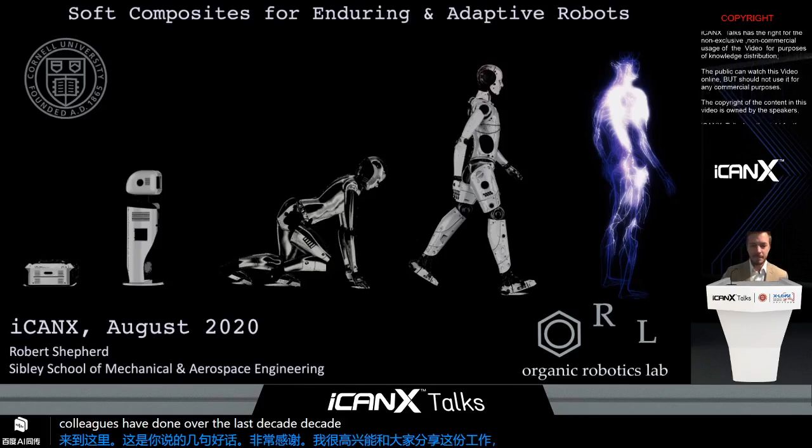Thank you very much. I'm excited to share the work myself and my colleagues have done over about the last decade. I'm going to structure the presentation more as a survey, a high-level presentation, and I encourage you to read the papers I talk about, and particularly the supplemental information, because a lot of details are buried in there.

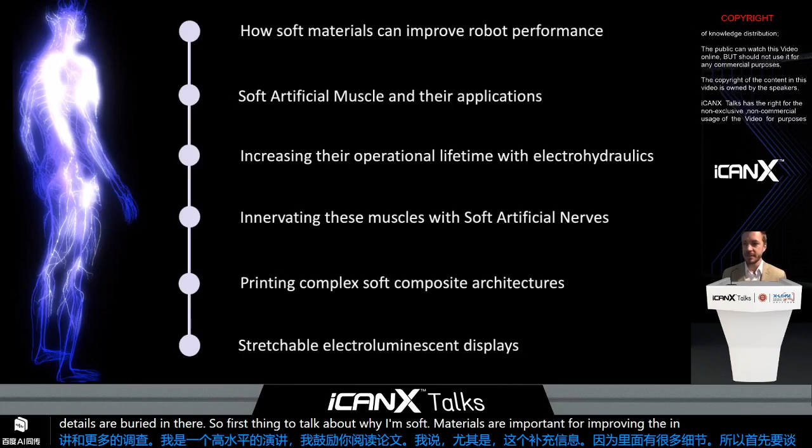So first, I'm going to talk about why soft materials are important for improving the endurance and adaptability of robots generally. We'll talk about soft artificial muscles specifically and their application right now. Then how we can use these soft artificial muscles in combination with electrohydraulics to improve the operational lifetime of robots. Then how we can add sensing, touch sensing, to these musculoskeletal architectures.

And all this is really complicated, so if we have to manufacture these and it's too hard, it's not worthwhile. But luckily additive manufacturing allows us to do these things, and so I'll talk a little bit about printing soft composite architectures. And then I'll end, if there's time, with stretchable electroluminescent displays.

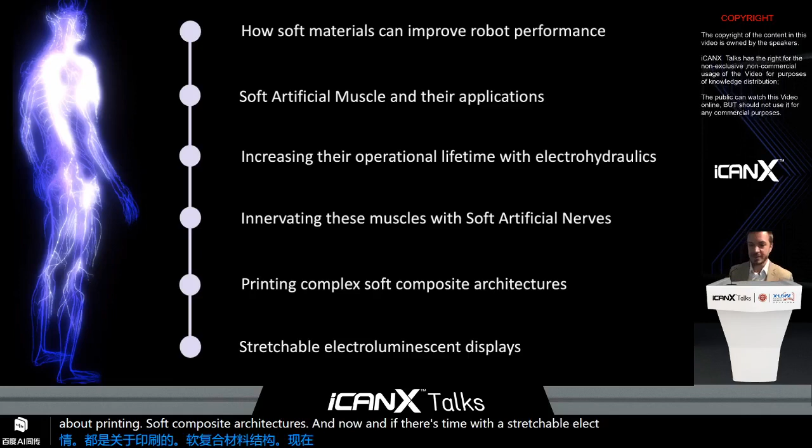So there's a fundamental contradiction that we need to solve, or a basic contradiction we need to solve in robotics, and that's that we can have enduring robots right now today, or we can have agile robots right now today, but we don't have both.

An example of an enduring robot is that of an autonomous vehicle, and they can already drive for, at least in the electrical versions, more than 300 miles on a single charge, go faster than 200 miles per hour, and accelerate from 0 to 60 in 2.5 seconds. But at least in the US, the reason this works is because we have flat roads, and that costs us hundreds of billions of dollars, probably around $1 trillion today, to create that.

Legged robots wouldn't need roads, but they're very agile. You've all seen examples of robots doing backflips and running and all these things, but they can't do it for very long. It's not comparable to wheeled vehicles and not comparable to their animal models they're based off of.

At this point, I'll also say there's a lot of prior work that I would like to cite and talk about, but there's not that much time. And also I didn't know about taking pictures off of their papers and putting it on here and the copyright consequences, so I won't be talking specifically about that, but please, I'll let you know along the way as I'm reminded of other people's work.

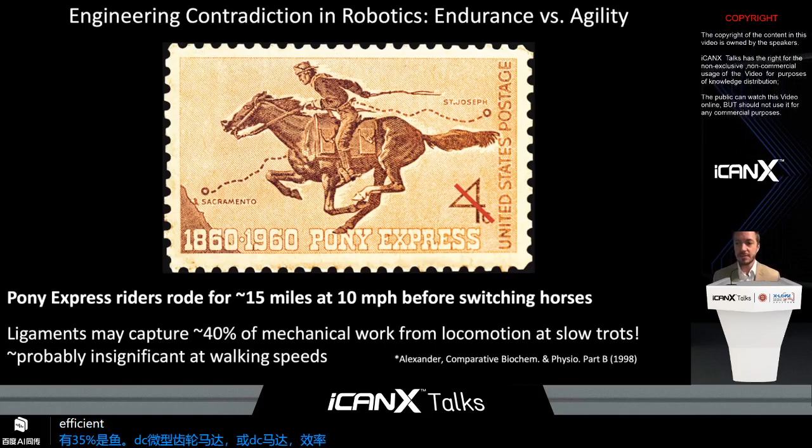One of the reasons these animals were so efficient and effective at what they were doing is that their musculoskeletal structure, ligaments, and both soft and hard composite architecture are very energy efficient, even though they're working with not the most efficient actuators. Muscle is around 35% efficient. A DC microgear motor or a DC motor is something like 85% efficient. So the animal world doesn't have the most efficient systems, but they deal in the real environment in a very efficient way.

So to boil it all down, the reason animals and humans are so effective over, let's say, anthropomorphic robots, is that we have hundreds of skeletal muscles, depending on how you want to think about it—could be thousands or tens of thousands. Robots have tens of actuators. We have vasculature that delivers energy-dense power to our motors, our muscle. Robots have a centralized power system that delivers energy over wiring to remote locations.

This power source is a single function—all it does is deliver power, it doesn't do anything else. Our vasculature handles thermal loads, removes waste, performs a lot of other functions.

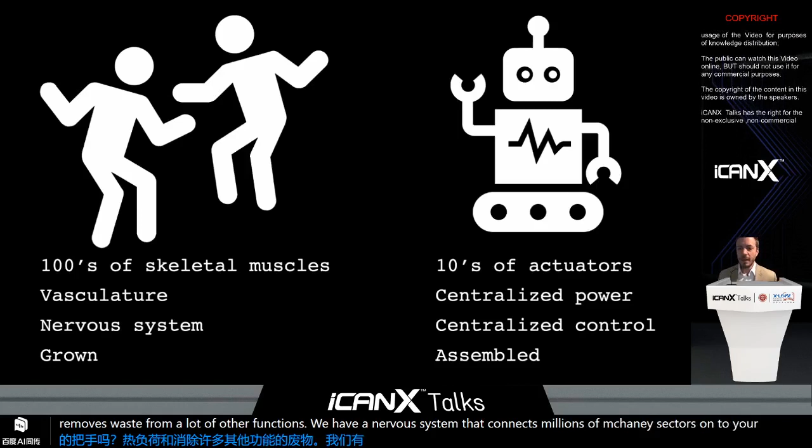We have a nervous system that connects millions of mechanoreceptors to our brain. A robot has a centralized controller that does sensor fusion for just a few types of sensors: vision, sometimes tactile sensor, optical encoders, stuff like that, but many orders of magnitude less information than we use. And humans and other animals were grown from the bottom up, and that allows us to be complicated, where robots are assembled from the top down and fundamentally limits the complexity that robots can have.

I find it interesting that the very first use of the word robot was in Rossum's Universal Robots, a play published in 1921. In this play, robots were grown or synthesized from a green sludge, organic matter. But in the plays that came after it, robots were represented as metal, rigid structures. I think if we had embraced chemistry or soft materials from the onset, we'd be farther along than we are now in this space.

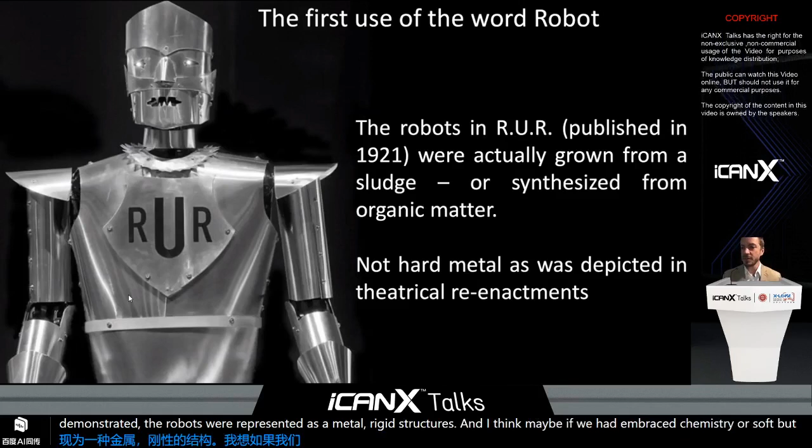And I think we're getting there now. Nature designs with toughness in mind, not really strength. One reason is that high temperatures aren't really available in nature, and you need high temperatures for processing ceramics and metals. But rubber, polymers, and other composites don't need to be processed at high temperatures, and that's why you see soft materials so prevalent in nature. It doesn't mean it's the best choice all the time, but it's generally a good choice, and that's why we see it everywhere. You can see that in the stress-strain curves of ceramics, metals, and rubbers.

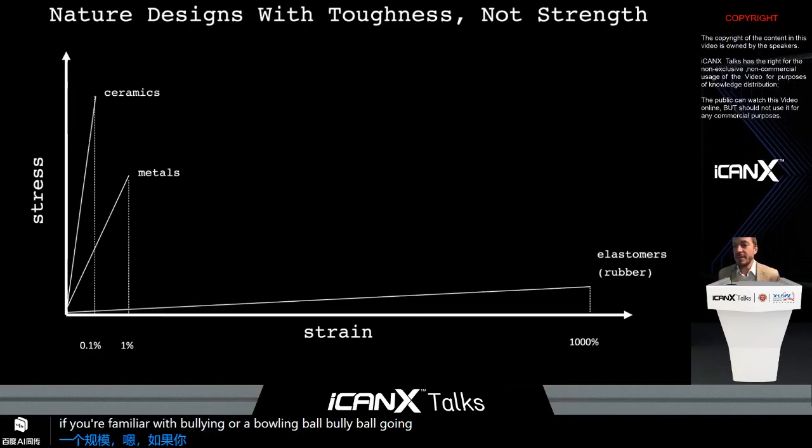Now, these aren't to scale—or they are to scale, but they're disproportioned. Still, rubbers absorb huge amounts of energy, megajoules per cubic meter. To set a scale, if you're familiar with bowling, a bowling ball going down an alley to knock pins over uses around 10 joules. So that's how much energy these rubbers we produce are capable of absorbing.

Rubber and polymers are a completely different type of material than a ceramic or metal. If you look at a simple model for rubber deformation, it's entropy dominated. That means polymers want to be a random, coiled network, which gives them the most configurational entropy. But when you stretch them, you're aligning those polymers, which is entropically unfavorable—it reduces the entropy, which is energetically unfavorable. Since this is a conserved volume, when you stretch it, you shrink in the other directions.

So you can relate these principal strains to each other. If you take the derivative of that free energy while stretching in one direction with length, you get the force required to stretch in that direction, and then, dividing by the area, gives you the stress. That stress is proportional to the number density, N over V, of polymer chains and the temperature. This quantity is the modulus of the material, how hard it is to stretch. If you increase the temperature, you increase the modulus—you make it harder to pull. This is very different from a metal, where as you heat it up, it becomes softer. So this is sort of like an alien material.

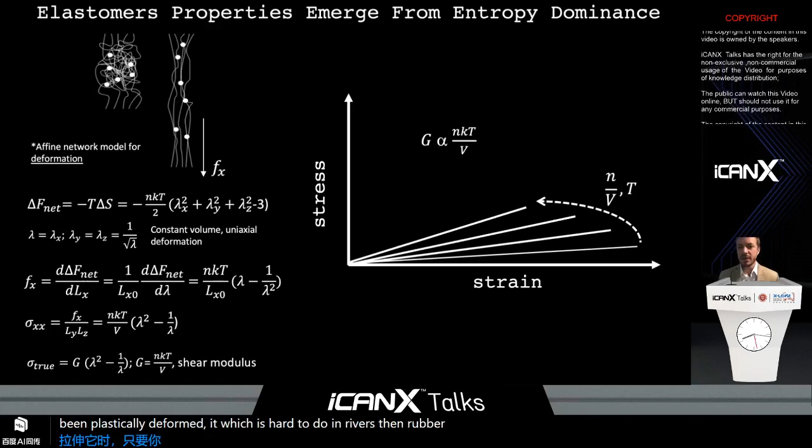Another benefit of using polymers in your robots is that when you stretch it, as long as you haven't plastically deformed it—which is hard to do in rubbers—then when you relieve that stress, you return to the original shape with little energy lost using today's synthetic rubbers. That means you get ligaments for free in your musculoskeletal architecture.

This is an early example of a soft gripper that we made. I made this when I was a postdoc in George Whitesides' group. What it shows is as you're inflating these fingers, they're wrapping around this fennel and finding the best way, probably a very good way, to distribute the force across the surface of that fennel to pick it up.

The reason I like showing this is it's doing this as a material computation. There's no computer in the loop here in the traditional sense. The material, or the fingers, are applying a force, getting force feedback from the fennel, and that stress-strain response causes the reconfiguration of those fingers. That is a material computation we do all the time. In the animal kingdom, we post-process and filter information mechanically before it gets to our brain at all, and that allows us to handle the environment much better.

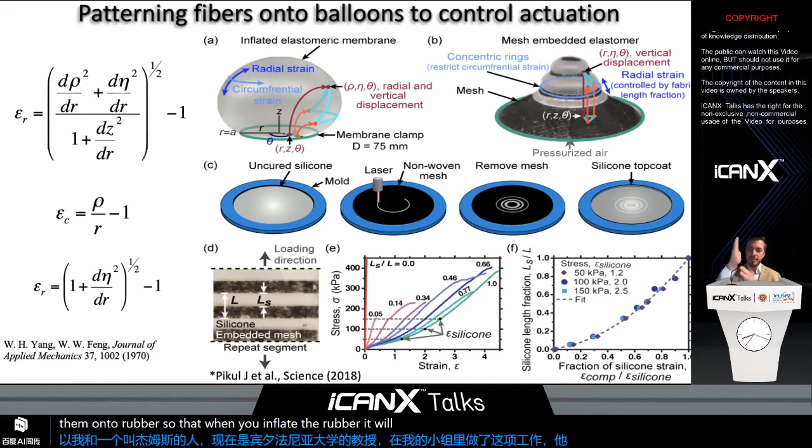By removing the circumferential strain from the modeling or predictive analysis, it becomes easier to tell how our actuators are going to respond. James Pikul, who's now a professor at UPenn, did this work in my group where he laser cut circles or rings of fabric and patterned them onto rubber, so that when you inflate the rubber it'll radially project where there is no strain limiting layer.

As an example of the power of this simple approach, he patterned an aloe plant shape so that when he inflates it, you can project these little projections. Based on the model he developed, we can program in zero and positive Gaussian curvatures, which in theory is all you need to replicate any shape.

I think fluidic actuators, or these types of balloons, are a very powerful approach for making soft robots. They're high force density, simple to make, and here's some examples of where we've applied them.

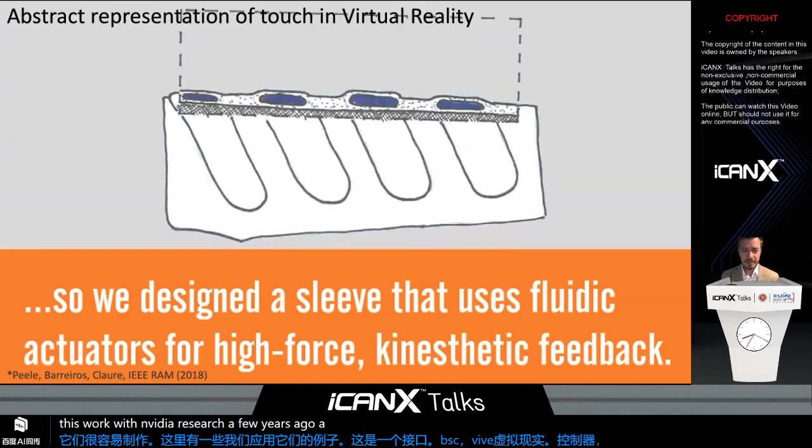This is a haptic interface for an HTC Vive virtual reality controller. We did this work with NVIDIA Research a few years ago. These are pockets wrapped around the handle of a VR controller, and when they inflate, you actually feel it on your hand.

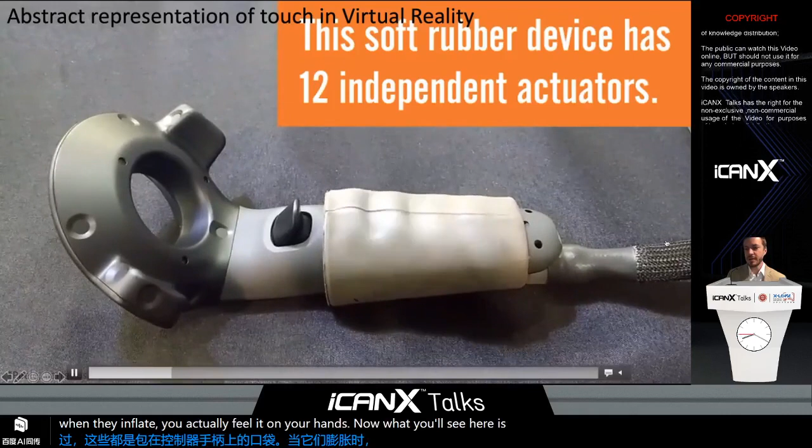Now, what you'll see here is a tether coming off because we need to deliver air or fluid. So these are tethered, and that is a disadvantage. But in a few minutes I'll show you one way we're working on getting rid of that tether.

In this case, what you're seeing is when Bryan Peele, who now works at NVIDIA, was squeezing that trigger, he made it so it felt like liquid was going through his hand.

That of course isn't what really happens when you would squirt a gun, but it's an abstract representation of touch. And because it's robust manufacturing that we can do, since these fluidic actuators are quite easy to make, he and Ben Mac Murray, who's now at 3M, were able to demonstrate this for thousands of interactions, and people really liked the tethered haptic controller versus the other one.

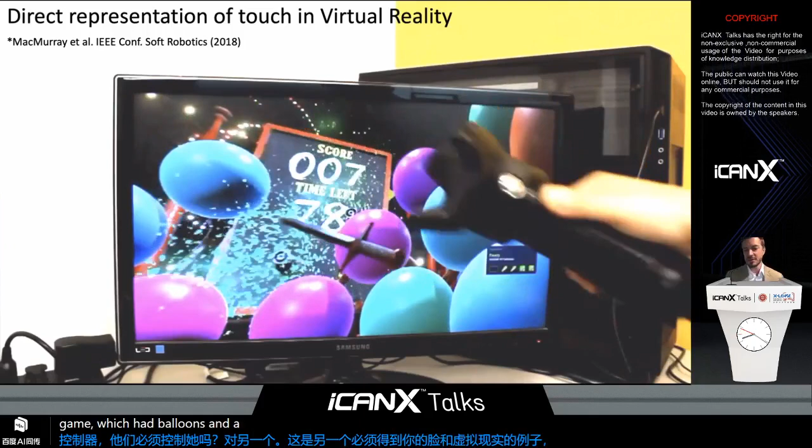This is another example of a haptic interface in virtual reality, where Omer Shapira at NVIDIA made this game with balloons and a steel sword, so you could pop the balloons when you hit them. But Ben, controlling it, can squeeze on the handle, send a barometric control to the computer, deflate the handle, and turn it into a spongy sword.

This spongy sword, of course, can't pop balloons, and you can see that in the game, but Ben also feels like he's holding a spongy sword because he has deflated that controller. This isn't an abstract representation of touch, this is a direct representation of touch.

We've also applied this to assisting with cardiovascular problems and helping a heart pump. Working with Weill Cornell Medicine, we received a CAD model of a heart, and then Ben molded a sleeve that would wrap around the heart and, when inflated, help it pump.

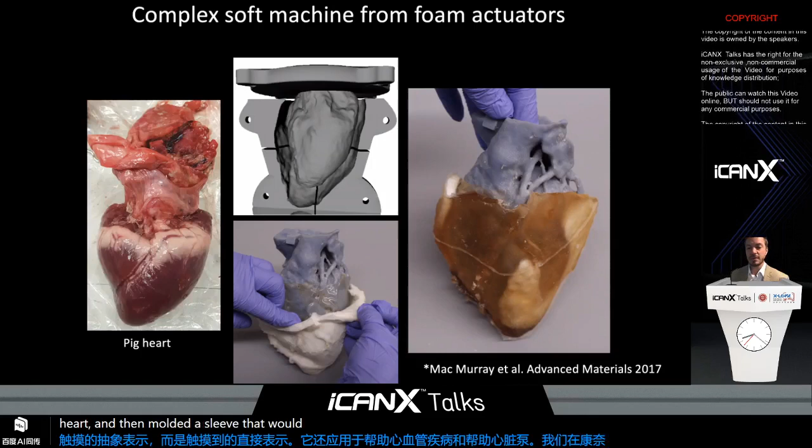We used an EKG to sense a heart rhythm, and then at the appropriate time, inflate the actuators. We were able to do this in time, so this is in rhythm with a heartbeat. And this is that sleeve helping this heart pump.

We were able to apply physiologically relevant, though not quite high enough yet, flow rates and pressures. You can see that this sleeve we made is thicker than it should be, but there's a lot of promise here to make a thin sleeve that can help the heart pump. An advantage here is that you don't put holes in the heart, which is how it's currently done, and it could even potentially be used for pediatric heart assist devices.

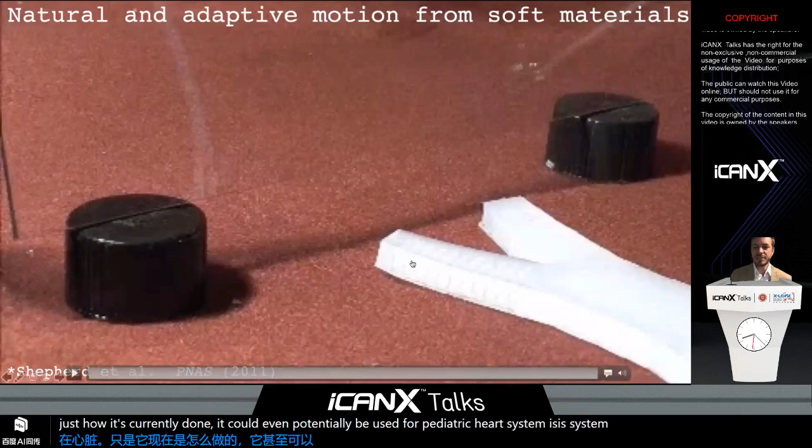So that was all applications in the non-mobile space.

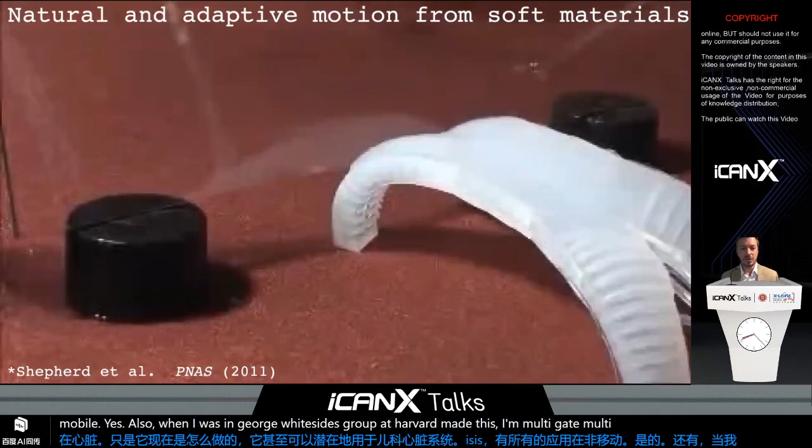When I was in George Whitesides' group at Harvard, we made this multigait soft machine that could walk towards this obstacle, and I'm controlling it from the other side. A much younger version of me was controlling it. When it hit that gap, I changed my control to cause it to undulate to the other side, still pulling along that tether - I'll talk about removing that tether later. When we get to the other side, I inflate the spine, and then it stands up and walks away, I promise you.

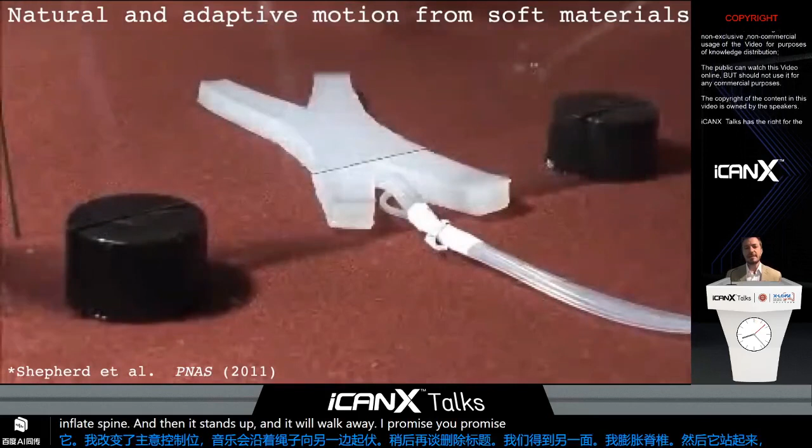We can call this a machine, or a robot in the materials community, because there is the potential for a stress strain response via that material computation. But we can also make it a real robot in the traditional sense by making it larger and putting the onboard electronics, sensing, and actuation in.

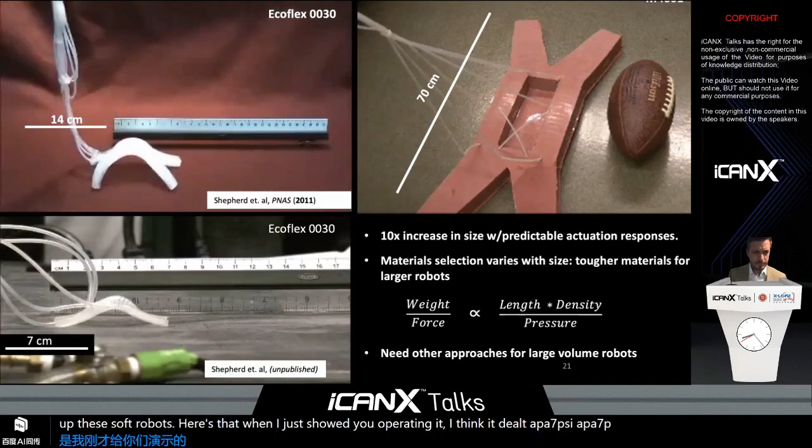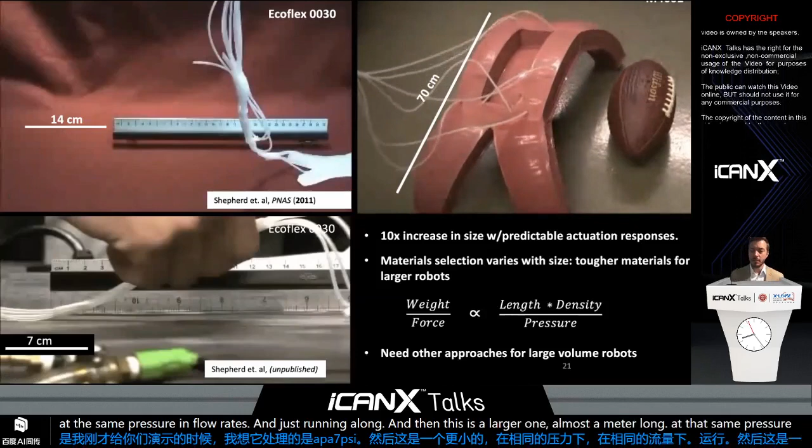But there's a problem with scaling up these soft robots. Here's that one I just showed you, operating at a delta P of 7 psi. This is a smaller one operating at the same pressure and flow rates, just running along. And this is a larger one, almost a meter long, at that same pressure and flow rate - it's moving much slower. Of course it would, because this is a mass transport problem. So this robot, this machine, is slowly lumbering along.

Also, when we increase the size of it, the weight goes up with the cube of the length, but the area only goes up with the square. Since we are causing force with pressure transduced over that area, eventually we lose and we can't lift this robot up with the same pressures. So we have to increase the pressure. The reason this robot is colored differently is because we're using a higher elastic modulus silicone so that I can eventually use higher pressures to cause it to go faster. That box, that relief pattern in the middle, holds the electronics, air compressors, and things like that.

But I think huge soft robots on land aren't the right answer.

So my first student was Huichan Zhao, who's now an assistant professor in mechanical engineering at Tsinghua and doing really good there. She helped solve a problem.

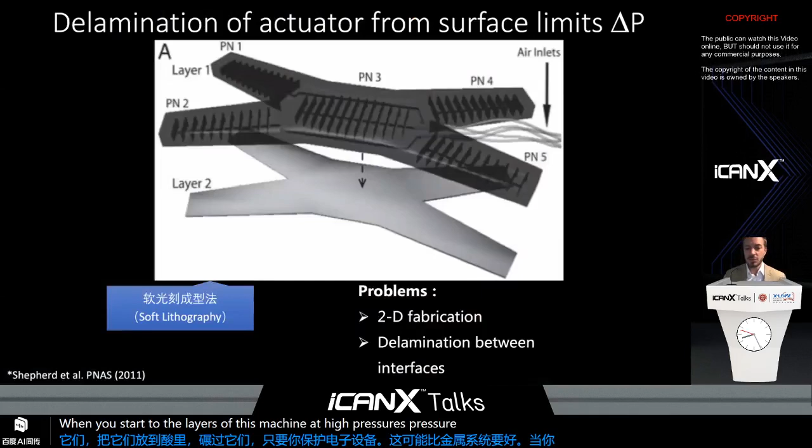If you look in this section of this robot, you can see this sort of bandage. That's because over time, you start to peel apart the layers of this machine at high pressures because we're bonding one piece to another piece, and that creates a very weak interface.

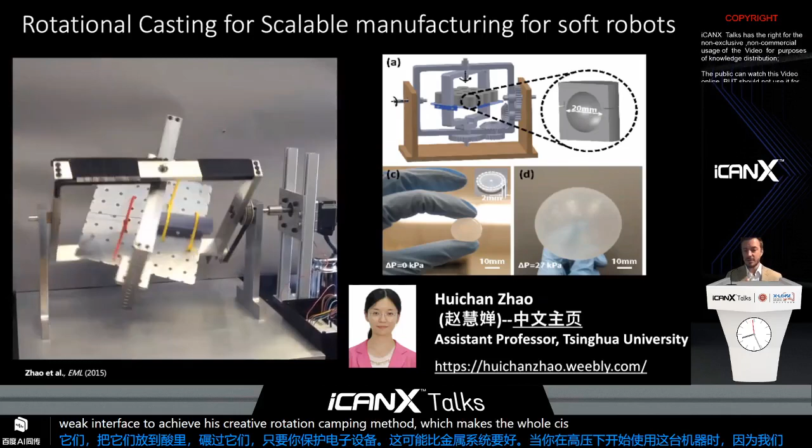So what she did is create a rotational casting method, which makes the whole system monolithic - there is no bonding of anything. She made a little hollow sphere and inflated it just to show this principle, making actuators that could apply 10 times the force of other similar actuators because she can apply higher pressures. So that is one approach to having larger robots using higher pressures.

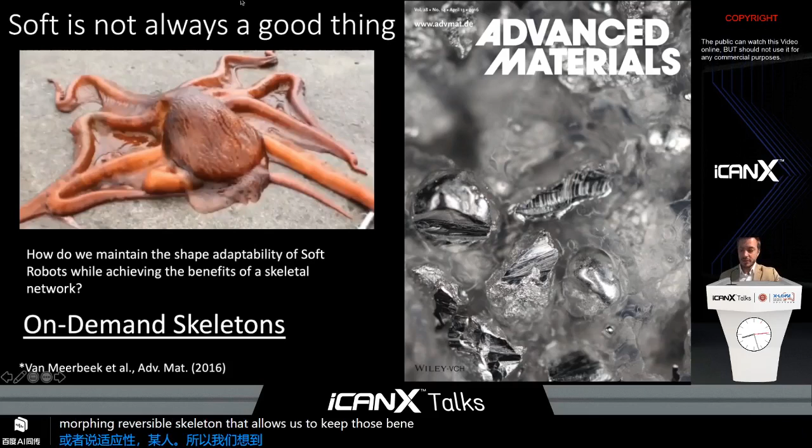But if we have a skeleton, we reduce our ability to morph, which reduces our adaptability somewhat. So we came up with an approach to create a morphing, reversible skeleton that allows us to keep the benefits of a morphing soft structure, but also bear load when the skeleton is on.

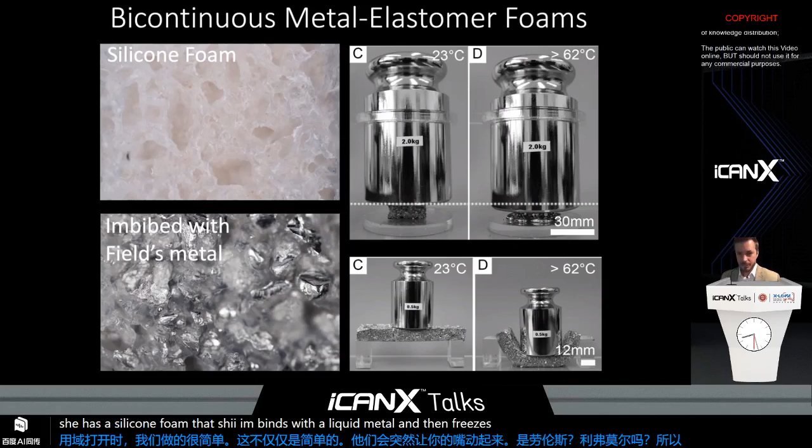We did that simply - this is Ilse van Meerbeek's work, who's at Lawrence Livermore right now. She has a silicone foam that she imbibes with a liquid metal and then freezes that metal at a low temperature. This is Field's metal, and it melts at around 60 degrees Celsius. So at low temperatures, it can bear a lot of load, and at higher temperatures, it deforms. That's the quite simple principle.

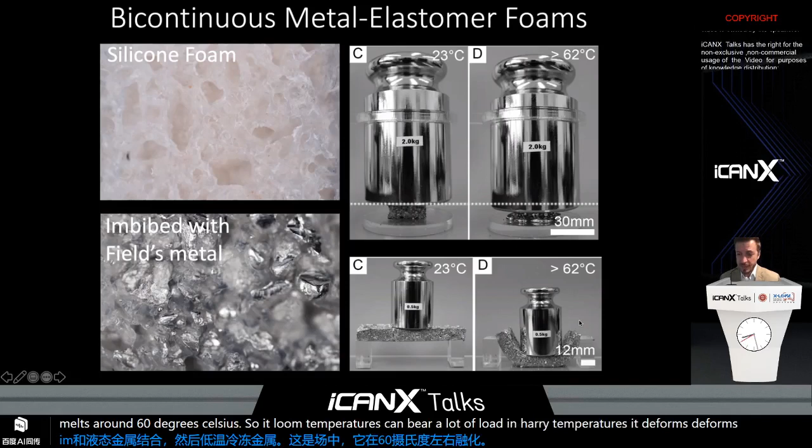It behaves a little bit like bone, because if you stretch it in its molten state and freeze it, you increase the yield stress in the direction you're stretching it. Bone does the same thing - if you're applying load to your skeleton and you have more load on one side of your body than the other, your bones will get thicker on the side you're applying load on.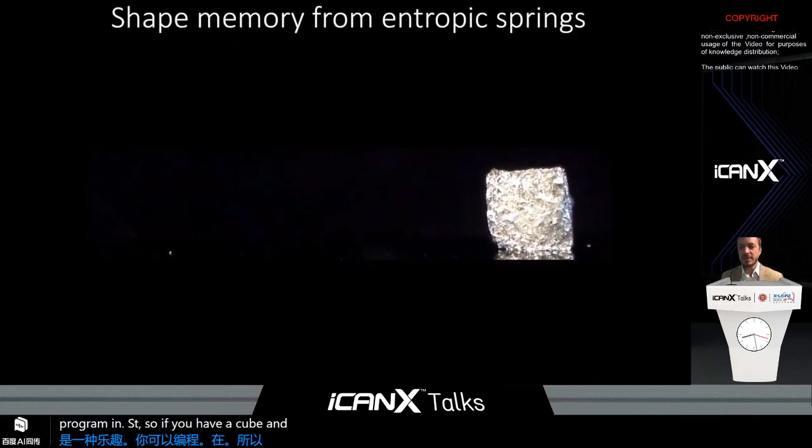And this is just kind of fun - you can program in strain. So if you have a cube and then you force it into a cylinder and freeze it in that state, because of the entropic elasticity of the rubbers we talked about before, you can get a single actuation event when you heat it up later.

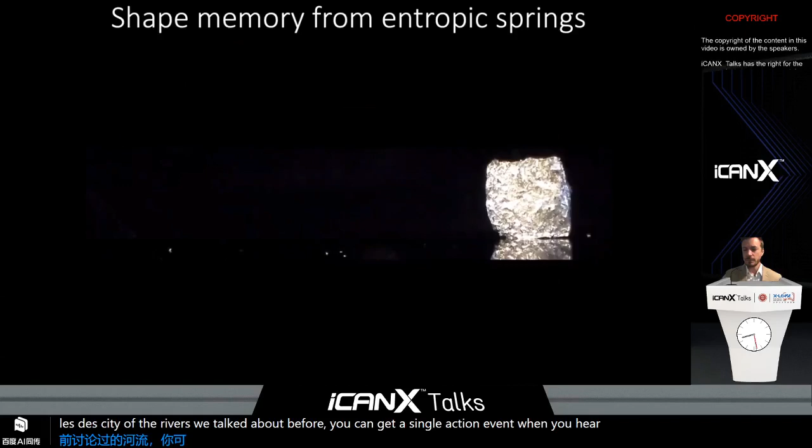So these are ways we can have soft artificial muscles that also behave as the architecture for the robot, and even have reversible skeletons. But you've seen tethers in all of these systems because we're delivering compressed air.

There's an opportunity to use fluids or liquids that are energy dense, like our own blood, in these fluidic actuators. Why would we do that? Because that same octopus on land, underwater has tremendous attributes. So what we want to do is make robots for use underwater, so that we can have an additional benefit of using hydraulics. Because if we have this hydraulic robot on land, it's not buoyantly matched, or not buoyantly supported, so it would be very heavy on land and have the same problems as that octopus we saw earlier. So it does appear that marine environments are a very good place to experiment and explore with soft robots, or very soft fluidic robots. So this is our first attempt.

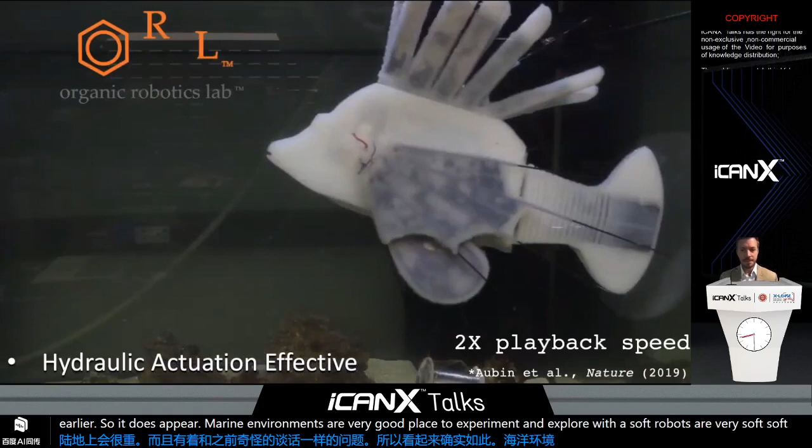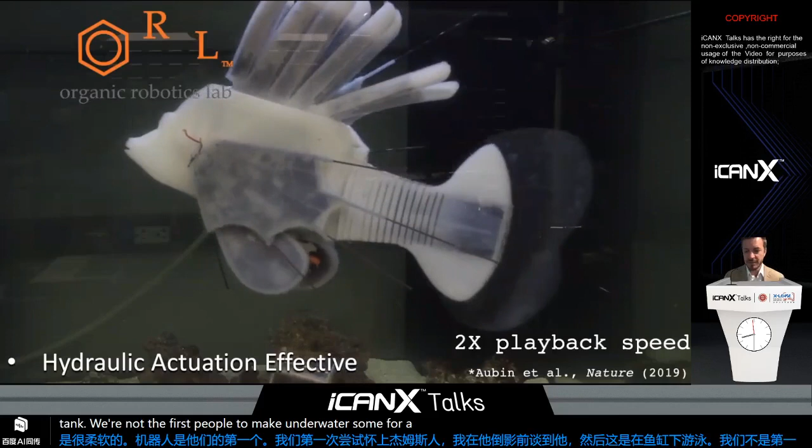You can see James Pikul — I talked about him before, his reflection there — and then this is swimming underwater in a fish tank. But we're not the first people to make underwater soft robots. Daniela Rus's group at MIT has done a great job of that. Cecilia Laschi's group at IIT, same thing.

This is a little different. If you open it up, we have pumps: a pectoral fin pump and a tail fin pump. The tail fin pump causes the tail fin to move back and forth and propel the robot. This pectoral fin pump just causes this pectoral fin to open and close as a biomimicking thing. It doesn't really help its propulsion, but this is exploratory, and so we wanted to try something else.

And it has two circulatory systems in it. This pump moves liquid in these pectoral fins, into and out of these pectoral fins, into this reservoir and back to the pectoral fins. And the tail fin is moved by moving fluid into and out of it to cause it to swim. You can see this red part here, and that's a catholyte.

And that's the biggest difference between our underwater robot and other ones: this catholyte is part of a half-cell redox flow battery. Here's an example of the pelvic fin battery, which goes here, which has a flexible zinc anode and the red catholyte. So that allows half of this to be a liquid battery that can then be used to pressurize these actuators and cause the fins to move.

You can see this liquid being pumped through this pump here. The overall reason for doing this is that if you replace the inert hydraulic liquids used in these fluidic actuators with a redox flow battery chemistry, or other energy dense fluid, to power electronics, you can power these pumps with the same fluid that is being used for actuation, which increases the overall energy density of the system. So if you look at this graph here, by using a 124 watt hour per liter zinc iodide half cell battery, we were able to increase the operational lifetime by about 3 to 4 times — increasing the overall energy density of this fish.

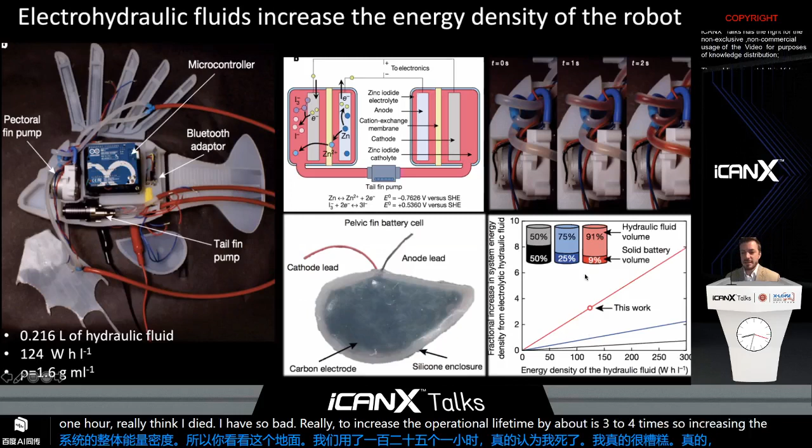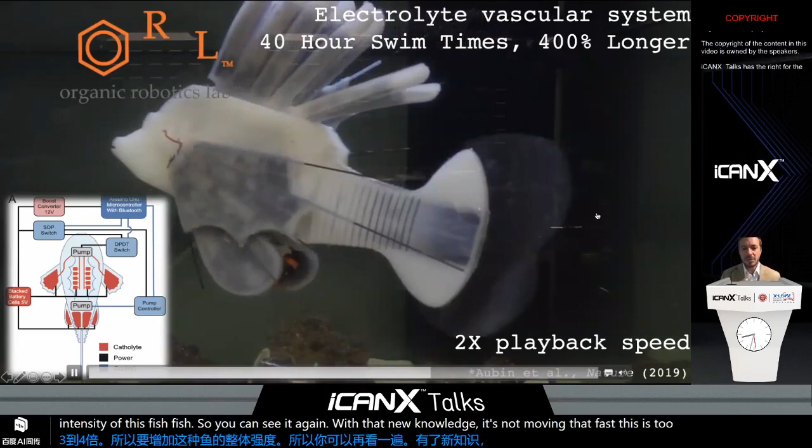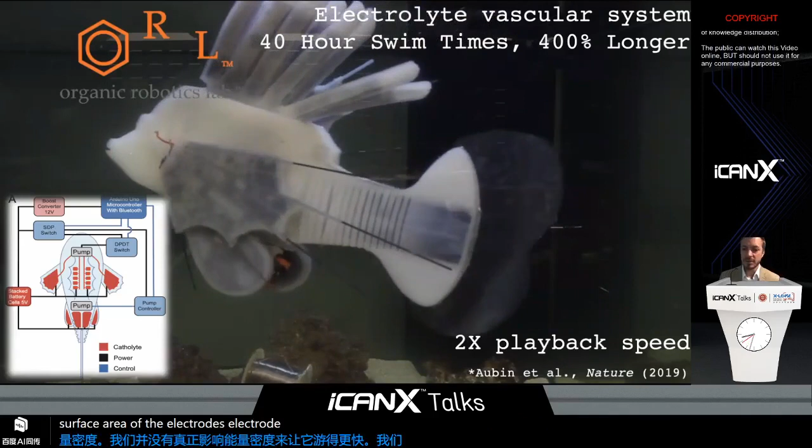So we can see it again with that new knowledge. It's not moving that fast — this is 2x speed — because what we've increased is the energy density. We didn't really affect the power density. To make this swim faster, we would need to increase the surface area of the electrodes, but of course that brings complexity in manufacturing. This wasn't 3D printed, but with 3D printing and that idea in mind, it would be very possible to increase the power density of this underwater robot.

But so far, none of the actuators or machines I've shown you have been true robots in the sense that a traditional roboticist would think — there's no sensory feedback, computation, and then response to the environment automatically. To do that, we've decided to take a cue again from nature and add touch sensors throughout our robots. I'll show you two ways we do that.

This is work from Patricia Xu, who has made stretchable light guides that are confluent throughout 3D soft structures, and each one of these light guides is actually a touch sensor. Other people who have worked on this — Yong-Lae Park and Matthias Kohl at MIT — are, I think, the people we come across in this field mostly.

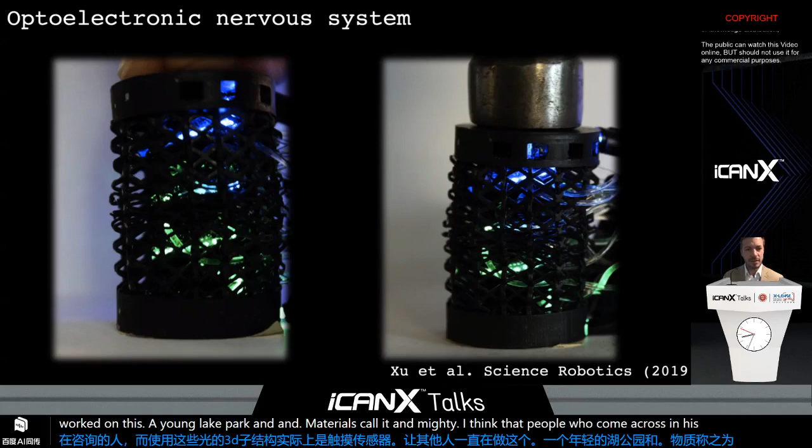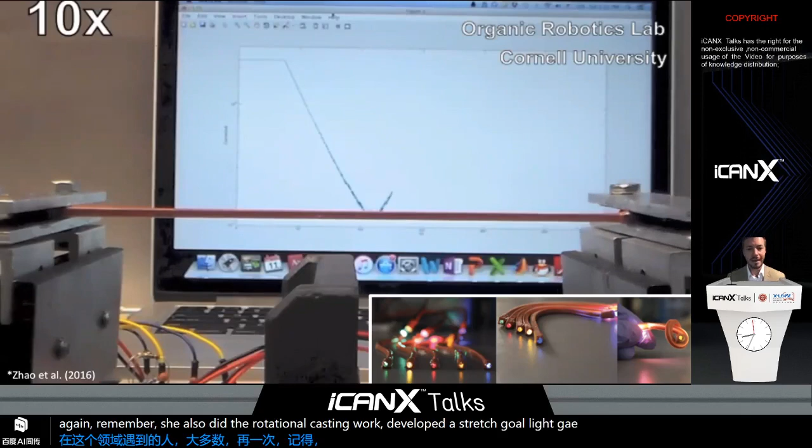Huichen Zhao, who also did the rotational casting work, developed a stretchable light guide with a core and cladding that we then applied to these robots. As she stretches them, the power output decreases simply due to Beer's law, and it's a log linear response, so it's decibels on the y-axis, but it's repeatable. She can do this thousands of times with the same response, and there's no electronics in the actual part that stretches. So you can decouple the electronics from the stretchable sensing using photonic sensors.

These are fiber optic devices. They're not as good as glass ones, mostly because the numerical aperture is smaller. The index of refraction difference between the silicone, in this case, and polyurethane gives a relatively low numerical aperture, but we still get plus or minus 30-degree acceptance angle of rays into our light guide. As long as these rays stay below a critical angle of 70 degrees, which they should based on the numerical aperture, they're trapped in this light guide.

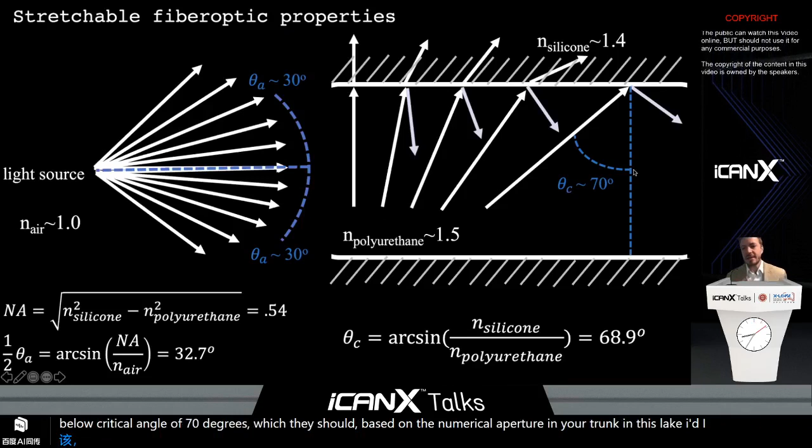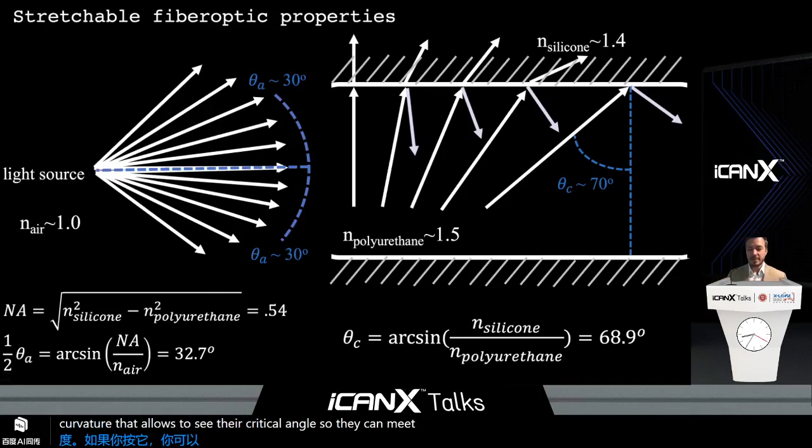That means light can escape in two ways. If you bend it, you can exceed that critical angle. If you press on it, you can create local curvature that allows it to exceed the critical angle. So light can leave from those two ways. But also, if you stretch it, you're increasing the path length that light has to propagate through.

It's not intuitive, or well, it is intuitive, but it's not something normal people in fiber optics think about, because they're used to inextensible light guides. But it's the same as if you take two pieces of glass and put them together, you get a decrease in power output due to impurities and other absorbing species in the glass. We have that in the light guides, and we're actually quite a lot more absorbing than a glass fiber optic, so we can't transmit for kilometers. We can transmit for meters, and that's okay because the scales we're working at are robot size scales.

So Hui Chen put 3 of these stretchable light guides in each finger of this fluidically actuated hand. As she's pressing on it, you can see the response at the fingertip. Then she'll actuate a finger, and you'll see 2 different power output losses from bending and stretching. She uses one to determine the pressure of the actuator and the other to determine the curvature.

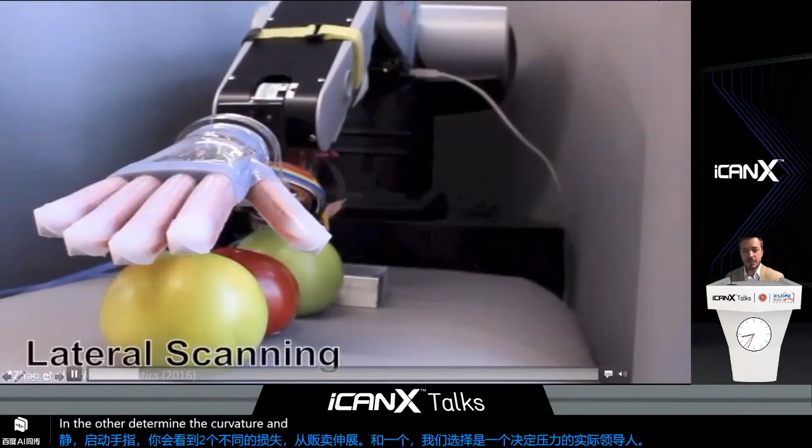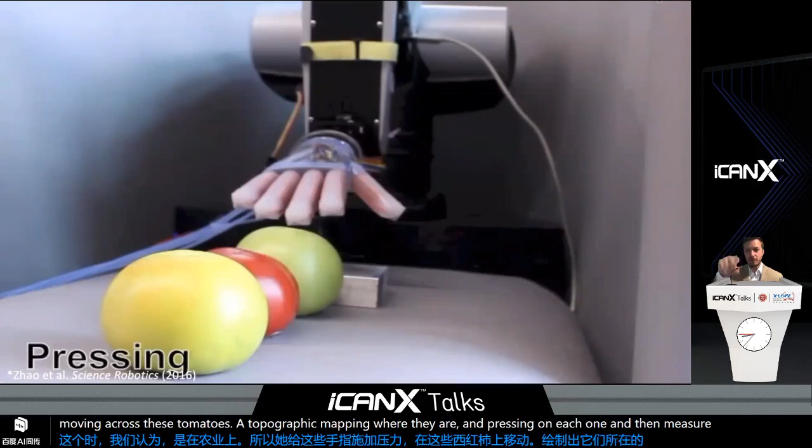One application for this, we think, is in agriculture. She's pressurizing these fingers and moving them across these tomatoes, topographically mapping where they are, then pressing on each one and measuring the force versus displacement response in the fingertip. It's very sensitive, and the one that displaces the most for the same pressure is the one that's the ripest. So she recognizes that the middle one is the ripest and selects it.

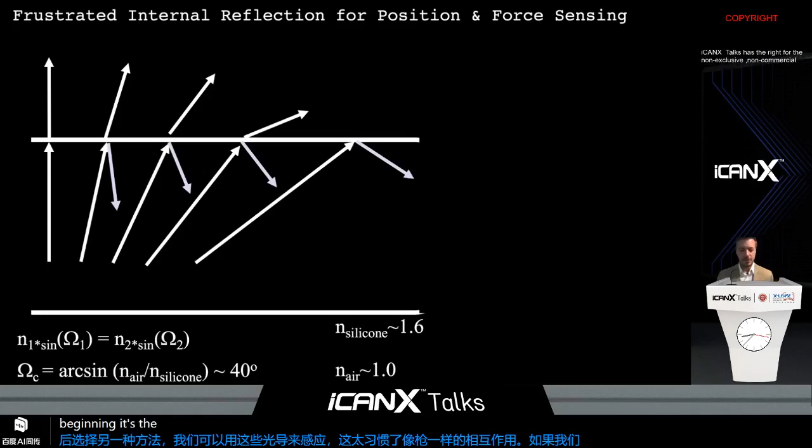Another way we can use these light guides for sensing is with 2 interacting light guides. If I stretch one of those light guides, you can't tell if you're stretching in the middle, the end, or the beginning—it's mostly the same effect. But if you have 2 light guides and press them into each other, you can couple light from one into the other. That's through a process of frustrated internal reflection, because if these light guides don't have the cladding on them, their indices of refraction match, and you don't get total internal reflection, so light goes from one into the other.

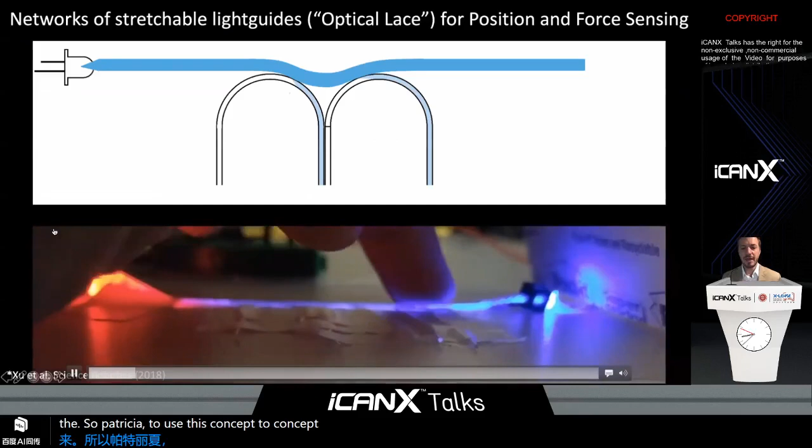So Patricia used this concept to determine the location of touch along a single powered light guide that's interacting with incident unpowered light guides.

She did it by printing matrices on a 3D printer with porous cladding channels, then threading these stretchable light guides into those channels. Because of the porosity, when you press one into the other, they actually touch and couple light. Because she's printing it, she can program the mechanical properties, almost like a metamaterial, so the structure can be soft for a bit and then stiffer, or stiff for a bit and then softer, then stiff again.

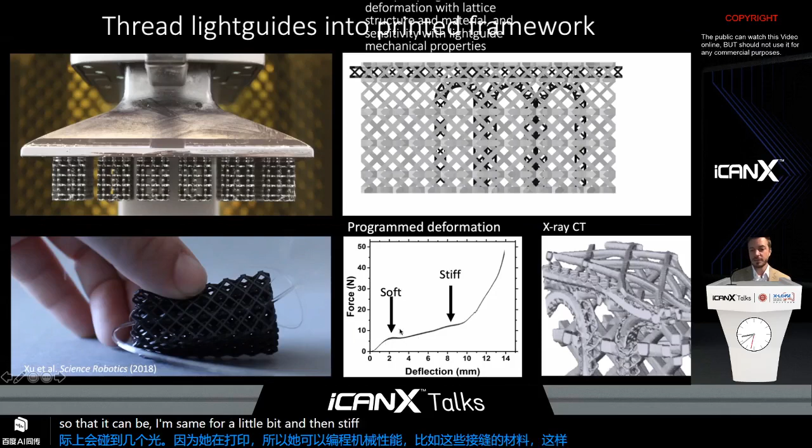This is a microCT of these light guides—when they're touching, this is how they interact. And this is the device she made with it.

There's one powered light guide on top and many unpowered light guides below. When she presses one into the other, the light couples, that's why we can see it. But the other end of the loop goes to phototransistors on the other side, which she uses to compute the location and pressure being applied.

Because Patricia is very talented, she made a very complicated soft printed architecture with a helix in the middle that carries a powered light guide, and many U-shaped unpowered light guides incident on this helix. She tuned the stiffness of the cylinder with another, thicker helix, then threaded the light guides into the cylinder and did finite element analysis to predict the displacements for a particular pressure.

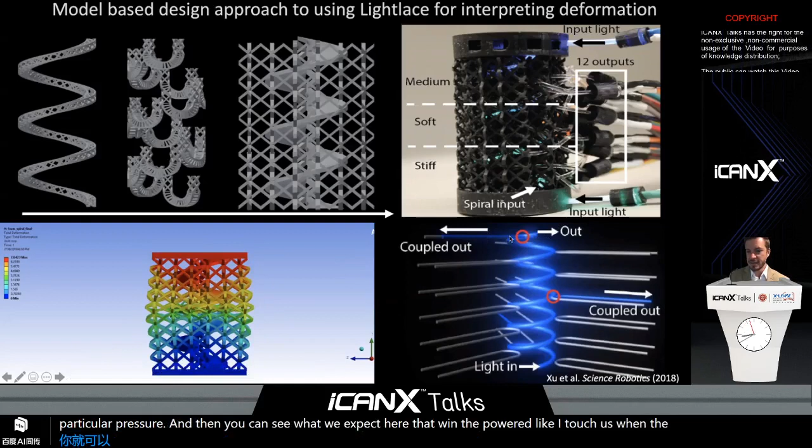You can see what we expect: when the powered light guide touches one of the incident ones, light will couple and come out. She should be able to relate the simulation to the measured output. You can see the raw data on the right and the reconstructed figure on the left, and it's doing what it's supposed to, because she printed the middle to be softer than the outsides. That's what we see here: the middle part displaces much more than the tops or bottoms.

She placed white dots so she could use digital image correlation to determine the actual displacements and compare them to the reconstructed motions. For this quite tall cylinder, she's getting around 3 millimeter positional accuracy, which is even better than when you try to touch your own back and figure out where you're touching.

So she used a model-based approach to interpolate those signals and figure out the shape of this object. If we have many more sensors, then a more appropriate way to train our robot or system to know its shape is probably through statistical learning techniques.

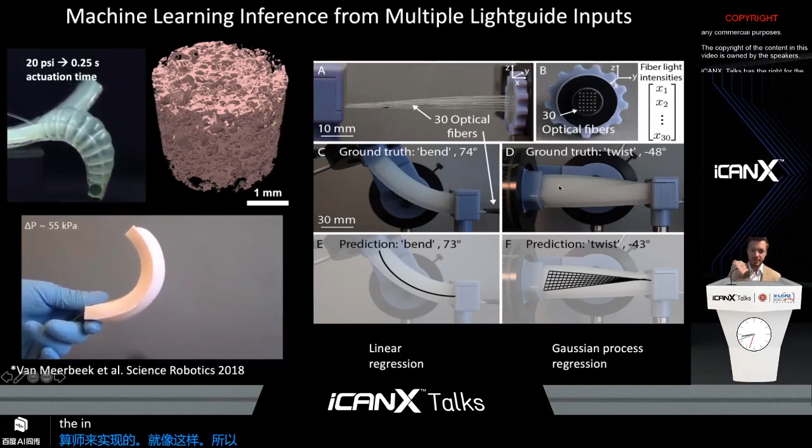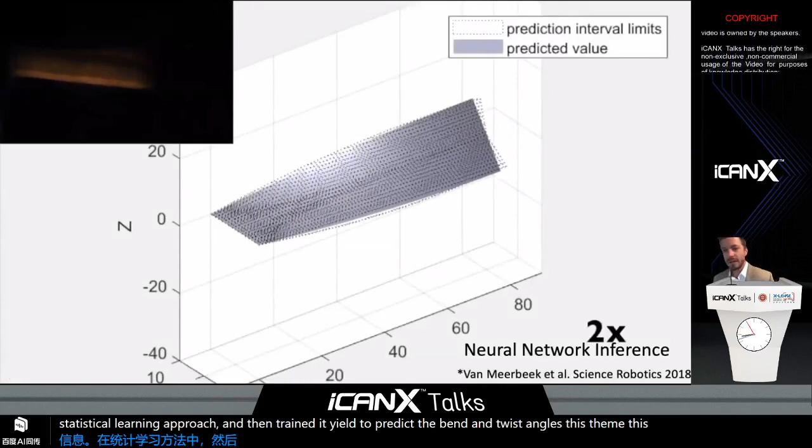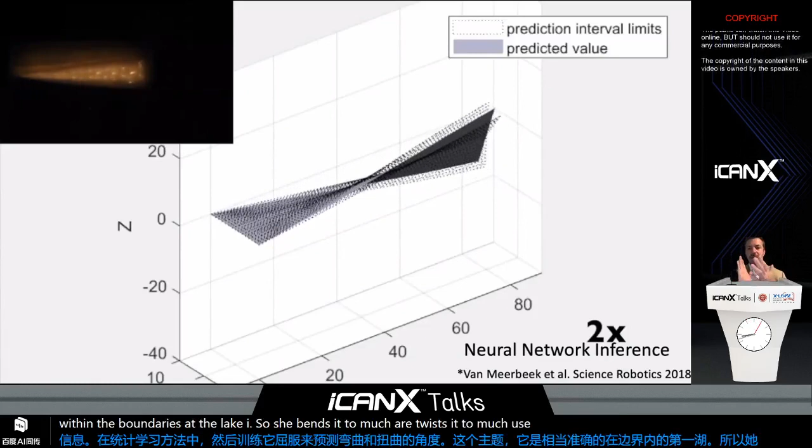If she bends or twists it too much, you start seeing the error bounds go way up. We believe that's because she used plastic optical fibers and not rubber ones. So we think the predicted twists and bends would be even better over a larger range if we use soft light guides instead.

I've mentioned a few times that we're relying on very complicated systems to make enduring and adaptive robots. That's what biology builds from the bottom up; right now we build from the top down. To do a lot of what I'm describing, electrohydraulic batteries, sensors everywhere, lots of actuators everywhere, it would be too expensive to be practical.

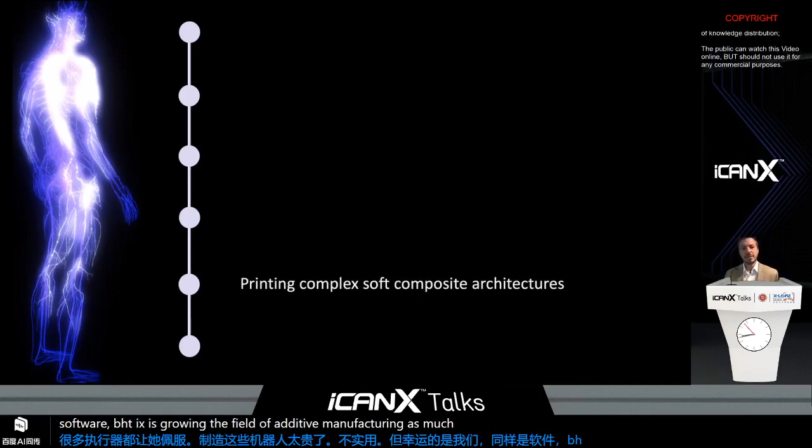But luckily for us, at the same time as soft robotics is growing, the field of additive manufacturing is maturing. So it's a tool we can use to get complexity for free.

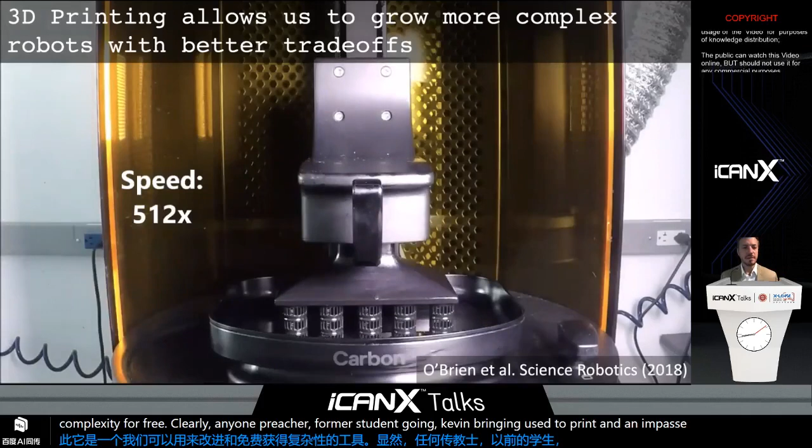This is a Carbon M1 printer that a former student of mine, Kevin O'Brien, used to print a prosthetic hand, and a passive transmission system he used to allow his prosthetic hand to be both very quick at grasping and forceful at grasping. These are the passive transmission systems he put inside this hand.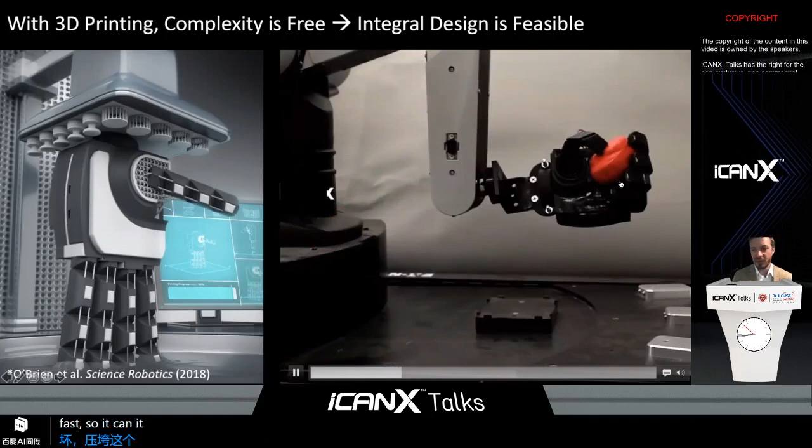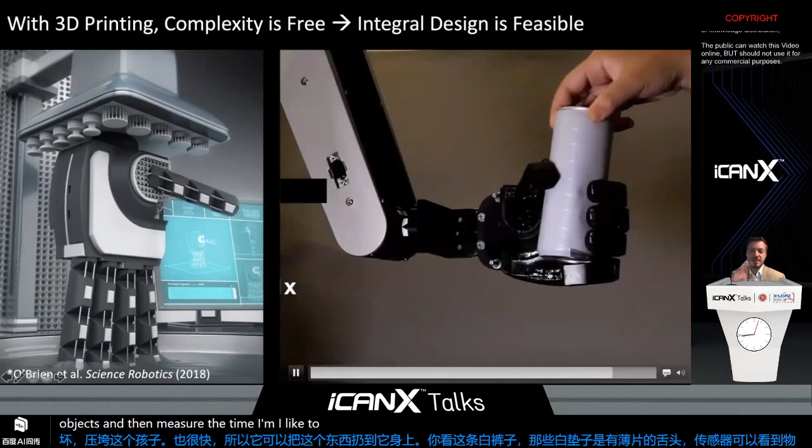These white pads are time-of-flight sensors that see objects and measure the time for the reflected laser. So that hand was actually automatically grasping when that ball was being thrown at it. It also has stretchable light guides inside for position control of the grasping.

Because this is 3D printed, we have exquisite control over the architecture and can put these small DC microgear motors, one per finger and two per thumb, on the inside of the palm of this hand, along with gradient stiffness structures that allow rotation of the thumb and the threading of tendons. This isn't a fluidic actuator, it's a tendon-based actuator that allows pulling and then grasping with the hand. These are the passive transmission systems, which allow variable gearing of the effective torque of this motor, so we can have high torque when it's loaded and high speed when it's unloaded. They rely on flexible living hinges that allow it to bend, and all of this is possible because we're using soft materials and a high resolution, high speed printer.

But all the materials you want aren't available on these systems, although they are very good now. So to provide a platform for alternative chemistries for printing, TJ Wallin created a thiolene-based silicone system using mercaptosiloxane and divinyl siloxane, varying the concentration or degree of substitution of the mercapto groups and the molecular weight between the vinyl groups to tune the elastic response, or the stress-strain response, of the printed structure.

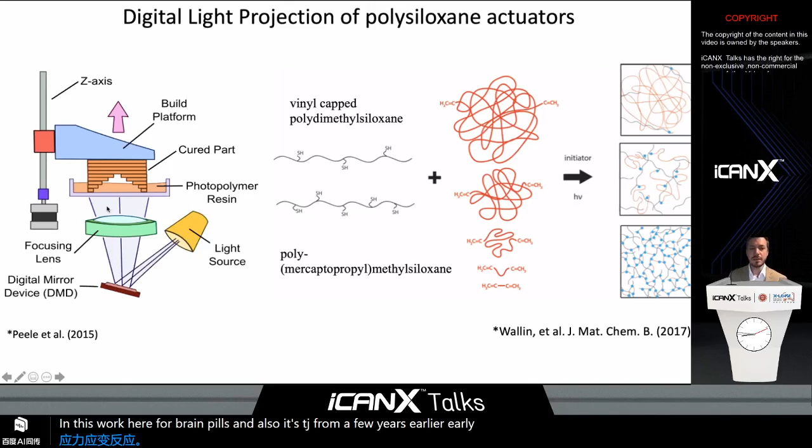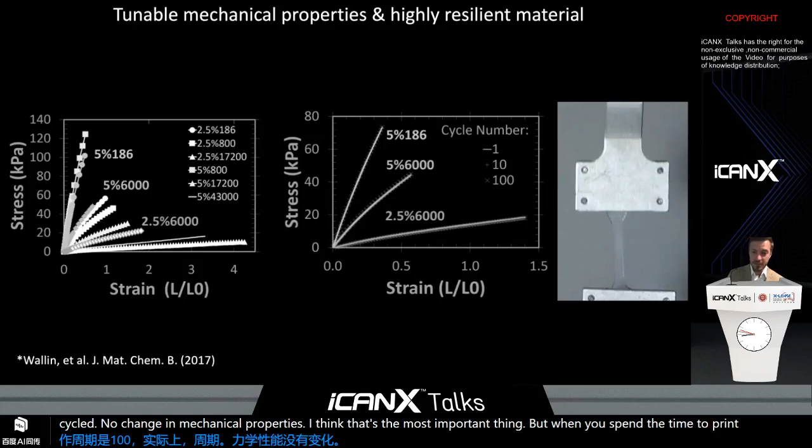This work from Brian Peele, and also TJ from a few years earlier, used commercially available elastomer resin to print actuators, which wasn't very good. It was good for getting complex architectures, but the parts would fail after only a few actuation cycles because they weren't resilient. These thiolene-based silicones are resilient though, and this stress-strain curve shows we can tune it to be very high strain and low modulus, or very high modulus and low strain. But the biggest result is that we can get hundreds of actuation cycles with no change in mechanical properties. I think that's the most important thing - that when you spend the time to print something, it doesn't break immediately.

And we get very complicated architectures with these silicones. This is just showing something you definitely couldn't mold. You could envision doing stuff like this for tendon routing or photonic sensing, or each one being a little fluidic actuator. The point is you can tune the modulus so it responds to loading in different ways depending on the application you're pursuing.

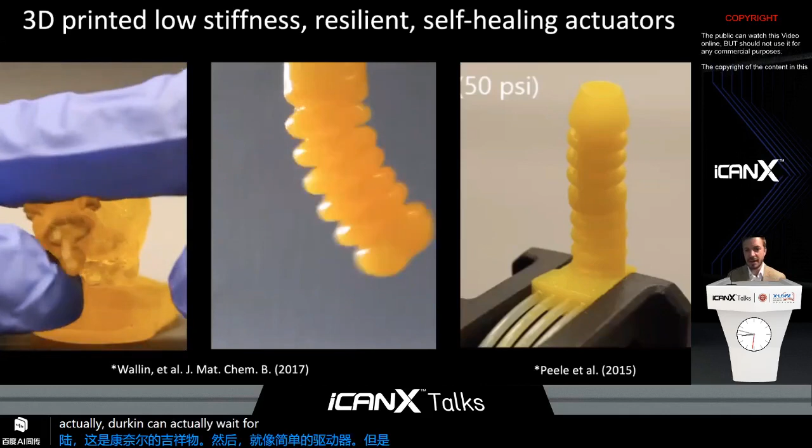So using this, TJ printed Touchdown, which is Cornell's mascot, and then just a simple actuator. The point is this actuator can actuate thousands of times without failing. This is Brian Peele's previous actuator, which is quite complicated - there are 4 different actuators in here being controlled. But the strain it can reach is more limited than the silicone one, and it does fail after just tens of actuation cycles.

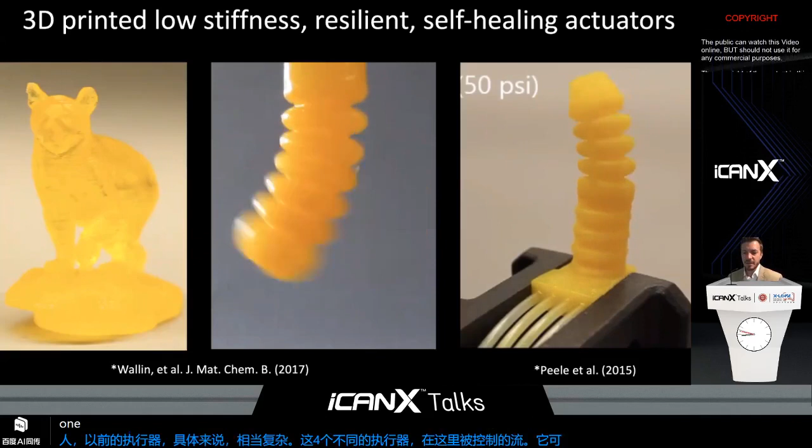Now that we have the ability to print our own chemistries, we worked with Emmanuel Giannelis's group, also at Cornell, on an acrylamide-based hydrogel made ionically conductive. Using acrylamide, an acrylated trimethylammonium bisacrylamide, and sulfonated silica particles that are negatively charged and tethered to the surface, we can create this ionically bridged network - negative silica, positively charged polymer matrix, and the covalent matrix of the network too. These two networks work together to improve the toughness of these hydrogels.

You can see us making these soft but resilient structures here, with a stress-strain curve shown. It's about 50 kilojoules per meter cubed, so it's quite tough still, even though it's soft.

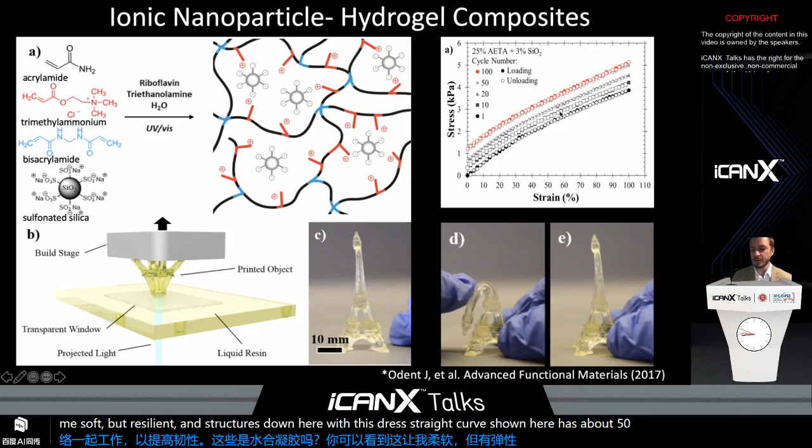And then this is again our mascot, and we're pushing it around. What TJ is going to do here is put an LED in it, then run an AC electric field through it to cause the LED to light up. This is related to a talk we saw by Zhigang Suo on ionotronics, and this is one example of it - just printing it.

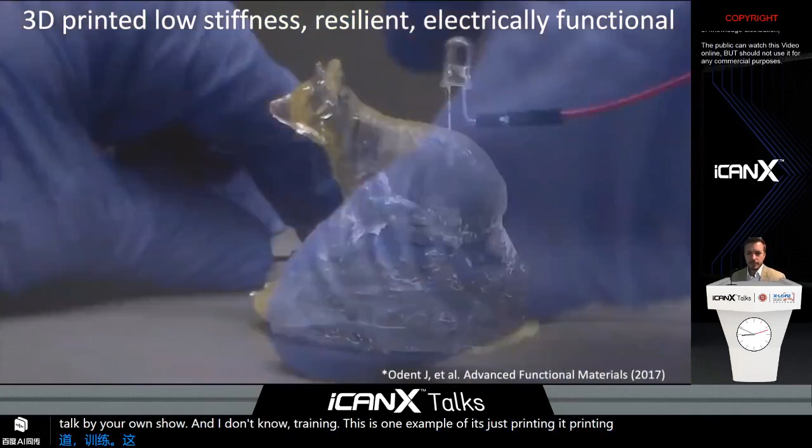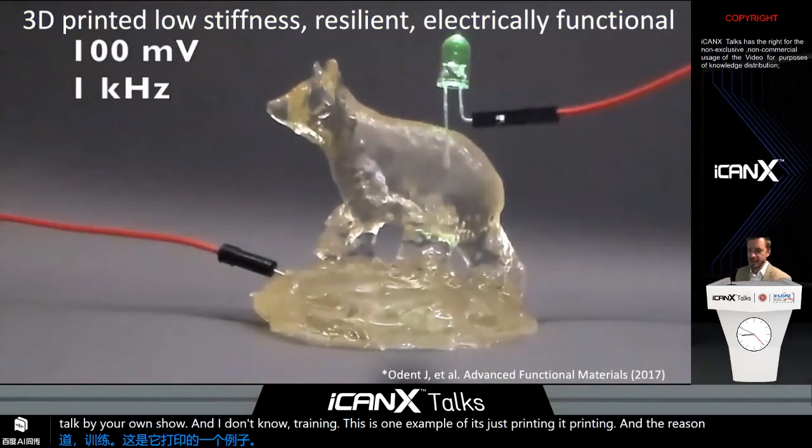And the reason this is working is because the ionic material in the composite is oscillating back and forth and driving that current. But this is using just a few percent of sulfonated silica nanoparticles - it's not really affecting the mechanical properties.

We would love to put more nanoparticles in here, but there's an upper limit, because as you add nanoparticles to these matrices, you're increasing the viscosity and elasticity of the suspension, and the printing process we're using doesn't like that. We rely on liquid flowing in while we're lifting up a build head - you can see that here. We fill a vat with this photopolymerizable resin, and the build head is in it. When you lift it up, the liquid is supposed to fill in, and then you print the next layer, move up, and so on until you have your part.

Traditional wisdom is that you want to use a very low viscosity system, like 5 Pascal seconds, you see a lot. But when you add these nanoparticles, which you'd like to use to create tough, electrically conductive, or maybe magnetically or optically active resin, you're increasing the viscosity of this suspension via Stokes-Einstein, and later on, as you increase the concentration, other effects come into play.

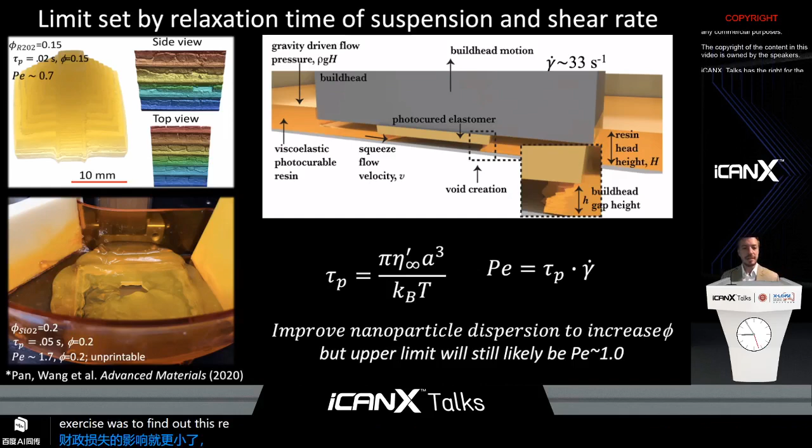Now, we could increase the concentration of nanoparticles without doing that, just by not using fumed silica but instead a stabilizing silica suspension, so that the effect on the viscoelasticity per volume fraction is less. But the point of this exercise was to find out this relationship between printing and viscoelasticity. So I think I have about 6 minutes left.

So I'll quickly run through some features of a stretchable electroluminescent display, which isn't really necessary for an enduring adaptive robot, but we believe is necessary for adoption of robots and making them accepted by humans. This is a flamboyant cuttlefish, one of the most impressive displays in nature. It's also extremely poisonous and is trying to let you know not to eat it. We saw that and wanted to replicate something like that, a soft morphing structure that could change its coloration.

To do that, we used a stretchable capacitor with zinc sulfide doped with different species like copper, which will, under a field-driven AC excitation, emit light of different wavelengths depending on the doping, at different intensities based on the shape of the wave you're applying. This is a highly extensible rubber, and we get a linear dependence of capacitance as we stretch it, which allows us, as I'm sure you've seen in other talks, to self-sense the deformation while displaying this information.

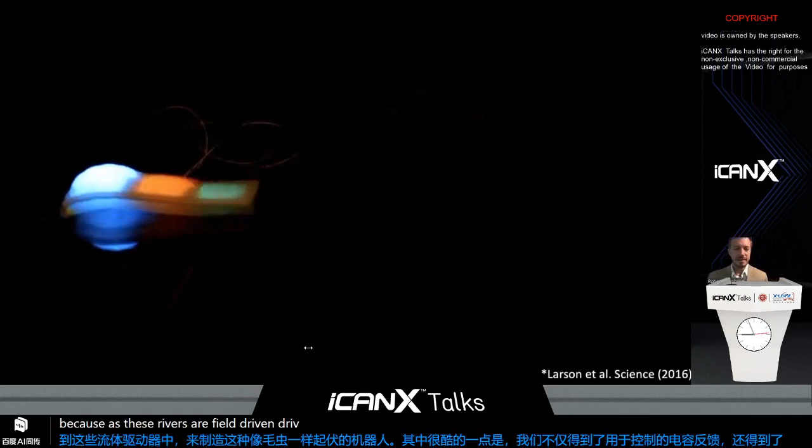We applied these stretchable capacitors with different dopants to some of these fluidic actuators to create this undulating caterpillar-like robot. One of the cool things is that we're not only getting capacitive feedback for control, we're also getting visual feedback, because as these rubbers are field driven, you get an increase in brightness based on how thin that capacitor is. When you're inflating it, you're also decreasing the thickness of the walls. This was done by Chris Larson, Bryan Peele, and Shuo Li, by the way.

So this is an inflating rubber membrane, and this is based off of a game, at least in the US, called Simon, which is a memory game that has different color panels, and you press them based on your memory to try and see the longest sequence you can do. But we did it so it's sort of like a vanishing interface. It's not there, and all of a sudden it's there, and also it's a joy to interact with.

So let me, yeah. So you can press it to hide information, and because of the capacitance change, you can also use each one as a touch panel.

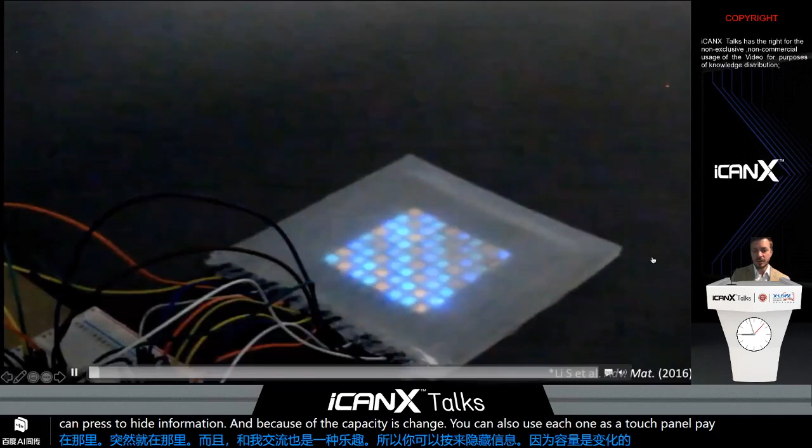Shuo Li, who just defended in my group and is now doing a postdoc with John Rogers, made this RGB display using transfer printing, but by hand. So there's a great opportunity to improve the resolution of this technique. And collaborators like Ben Chi are doing fantastic work increasing the brightness and reducing the voltage requirements of these systems. But you can see some crosstalk and some flickering here. That's because of the high voltages we need to drive these things. It's low current, so you can power these by battery, but still the high voltage is not great.

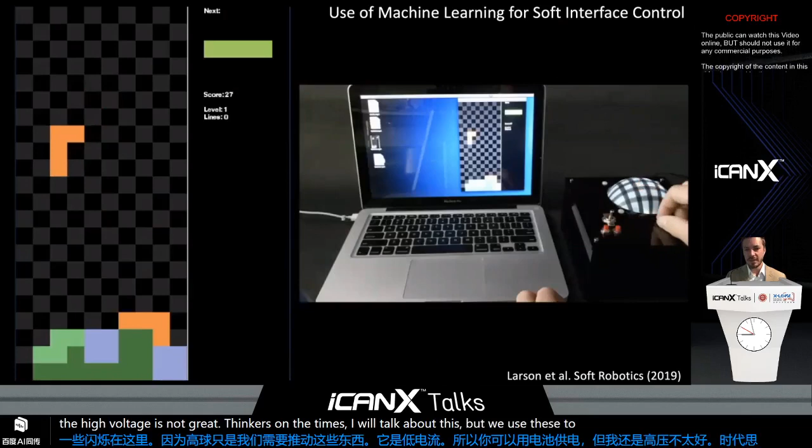I think there's not enough time, so I won't talk about this, but we've used these to control things like games. But my group is fantastic. I'm very lucky to work with these great students. I think I've mentioned everybody from this work along the way.

Kai-Yang Wang did the 3D printing. Shuo Li worked on the stretchable displays. Kevin worked on the prosthetic hand. Pan also worked on the printing. Patricia worked on the light guides. I don't see Lilia here, but she's working on light guides too. Anyway, great group. Sorry if I missed anybody, but I love working with you all.

And these are collaborators that have been represented in this paper: Emmanuel Giannelis, Meredith Silberstein, and Lynden Archer from Cornell; Barbara Mazzolai and Letizia Zullo from IIT; Yigit Menguc and TJ Wallin from Facebook Reality Labs; Josef Spjut, David Luebke, and Omer Shapira from NVIDIA. At Cornell Medicine, I work with Babak Mosadegh and Simon Dunham on the heart compression devices, and Roger Hanlon from the Marine Biological Laboratory for really understanding how octopuses work. I don't understand it, but I'm still learning, and how they're motivating our work. So thank you very much.

Okay, great talk. Yeah, really we see a lot of your papers, publications. Yeah, so this time I think a lot of questions were waiting for you. So Robert, we go to the question part. Okay, yeah, the first question is: Dear Professor Robert, amazing work. For the work pattern fiber on the balloon, could you tell more details like material, deformation scale, and how to control the 3D deformation? I think this was in the first part of the talk.